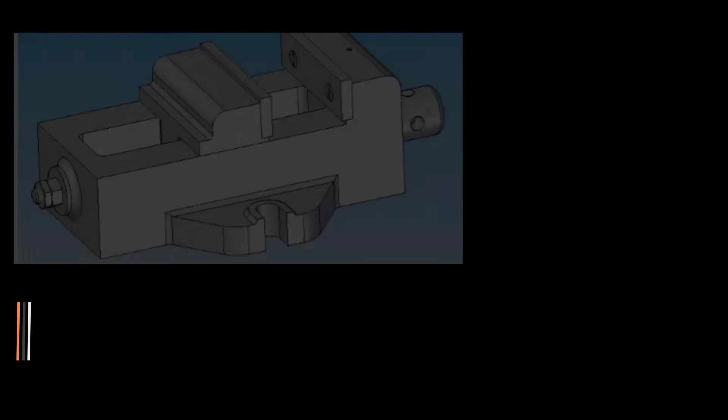Hello, welcome back everyone. In this video we are going to design the clamping plate, that is part number 9, which is shown here in the drawing. It is a square of side 50 mm which has 2 holes, that is countersink holes at the center, which are 24 mm apart.

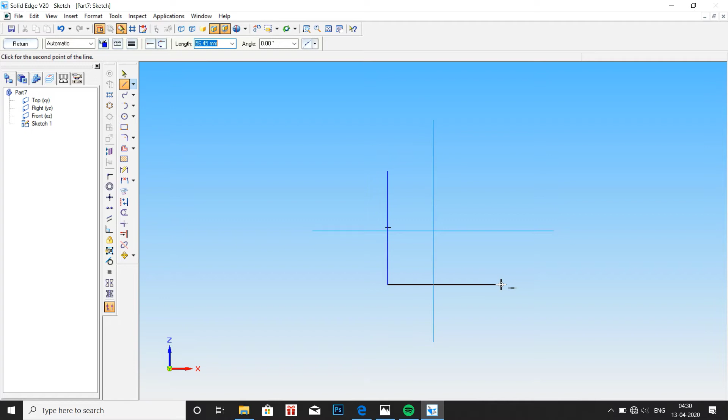So let me draw a square initially, and using symmetric axis and symmetry, make it symmetric about both vertical and horizontal axes. Now using smart dimension, enter the dimension for the rectangle as 50 mm on either side for both width and height.

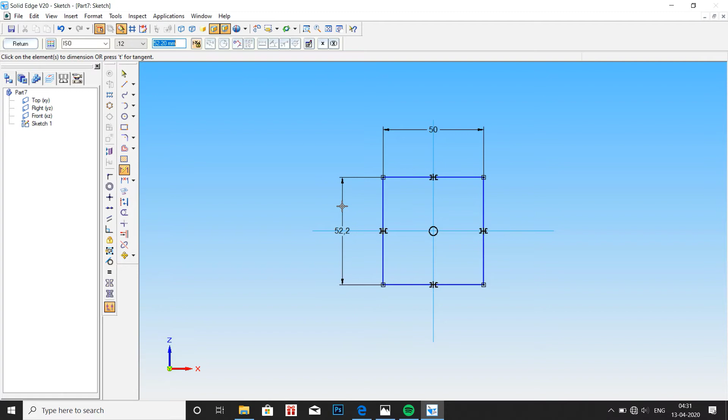Now it is shown here that the protrusion length is 8 mm. So click on return, go to protrusion, select the profile, click on OK and give the protrusion distance as 8 mm. Click on finish. Now go to hole, select this surface.

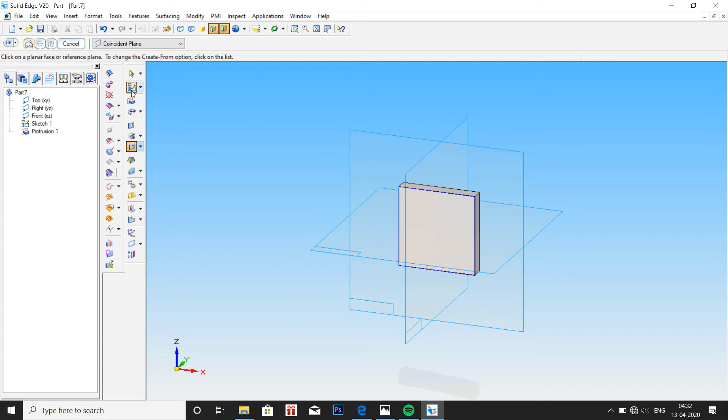Here the dimension for the countersink hole is given, that is it should be from 12 mm dia to 6.3 and countersink angle is 90 degree. Similar to the hole which we have done in jaw grip. Select the surface, go to hole table, select countersink, here 6.3 mm diameter and countersink diameter as 12 mm, countersink angle 90 degree.

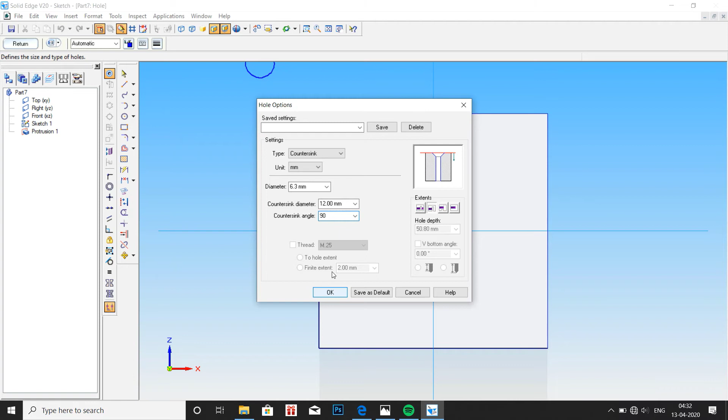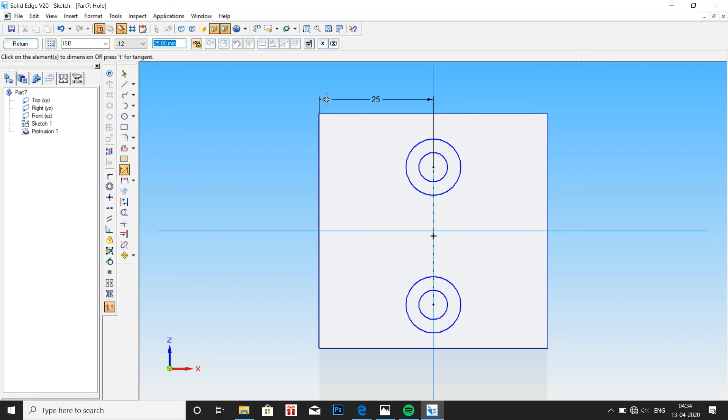Now click on OK. Just place 2 holes. Do not place them on the planes, just place them here. Now the distance from edge is 25 mm and distance between the 2 holes is 24 mm. Using smart dimension, dimension these values. Here 25 mm, distance between them is 24 mm. And distance between one hole to the center, we should give it as half of 24, that is 12 mm.

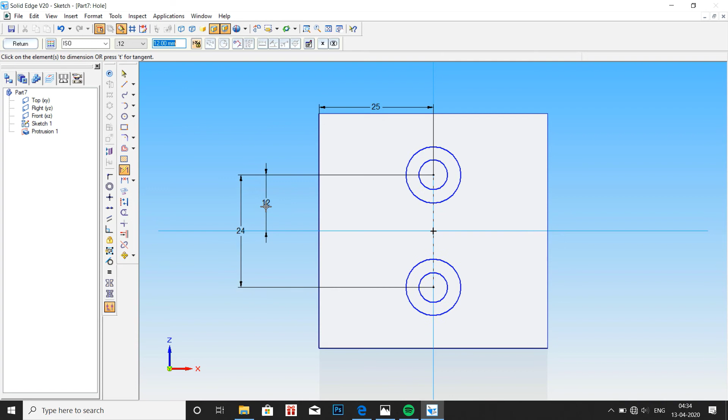Let us try whether coincide works, but coincide doesn't work, so let me use distance from one circle to center as 12 mm. Click on finish. So we are done with the clamping plate. Go to tools, material table, enter material as Fe410W and now click on apply to model.

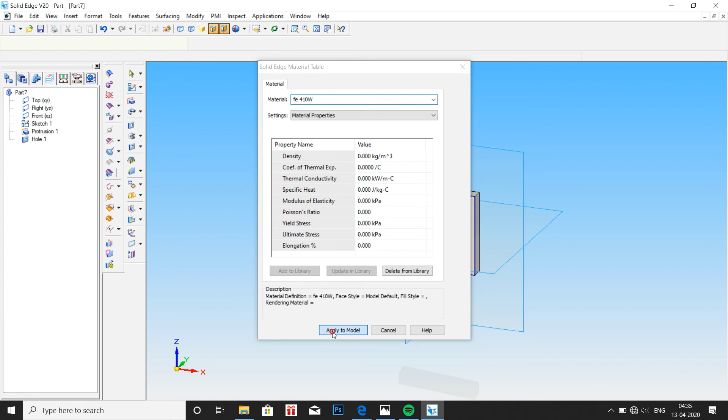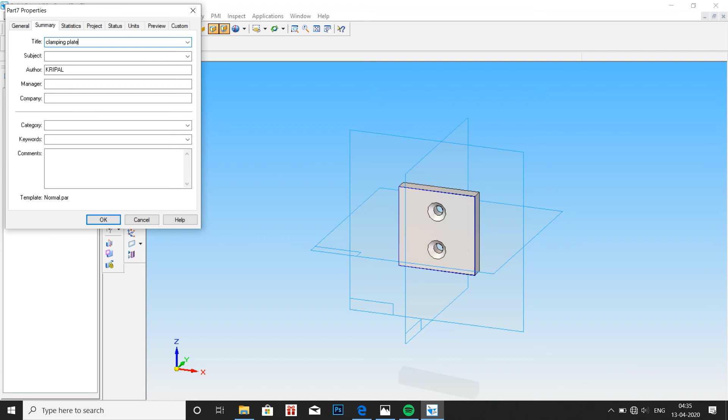Go to file properties, go to summary, type title as clamping plate. Now go to project, document number 9, and project name is clamping plate. Then click on OK and now save the file.